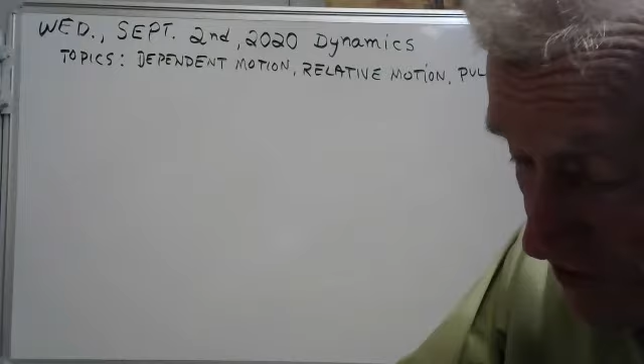This is today. It's about pulleys and how they work, and it also applies to gears and pulleys.

Well okay good, we still have 7 minutes before class, and you're my only student. This is a one-on-one right now. Do you have any questions on anything? Nothing comes to mind right away. Do you mind if I go grab my notes real quick? You take your time, do whatever you want, fix your coffee.

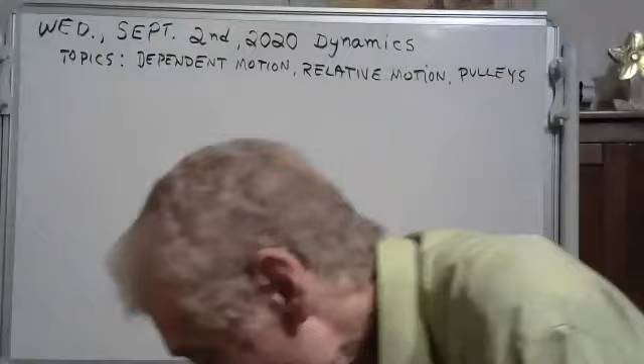Just took notes over 12.8 last night, and I don't really have too many questions over that right now. About where are we at with the lecture? What chapter, what part of the chapter? It's the tail end of chapter 12, I think, with the pulleys. Do you know what section we've got to learn? We've got to learn how to work these pulleys. Okay.

Have you tried watching the YouTube video? I haven't yet. I watched one last week. Nice to have it there in case you miss or in case you don't understand, you could watch it over. That might help. It does sometimes.

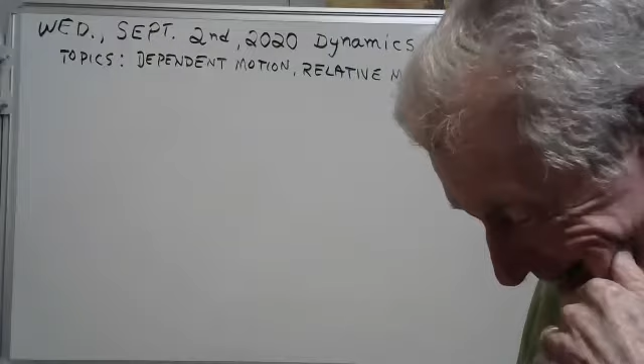Did you go to OSU Stillwater or OSU Tulsa? OSU Stillwater. Yeah, I was there last year actually, and I was bartending over at Murphy's down on the strip, but then COVID came along and closed everything down. So I decided to move back home and save some money while I'm finishing up. Good for you, Taylor. Thanks.

Well, I've never done any bartending. I'm a Southern Baptist, and we're not supposed to drink at all. Well, you're not missing out on much. Their drinks were pretty good.

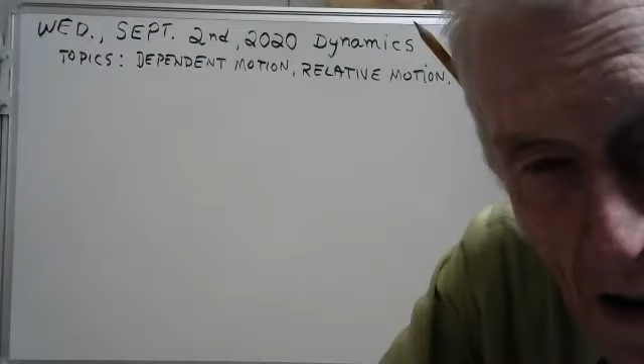The first topic is dependent motion. That's when two bodies' motion depends on one another, like for instance, a pulley. They have a lot of different kinds of pulley setups in this chapter. We'll just look at this one here. I happen to be on page 85, and they have a pulley set up like this.

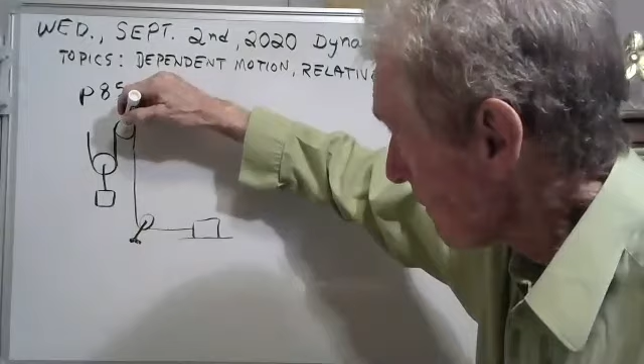You can tell if this is B and this is A: if pulley B goes down, A will go to the left. If this mass B goes up, A will go to the right.

My guess is B is going to go down, and A is going to go to the left. I don't think B is going to go up unless somebody pulled on A, and I don't see any forces there on A. So the interesting thing is they're dependent on one another.

You'll discover that A goes twice as fast as B. If B goes down maybe 2 inches, A will scoot over to the left 4 inches. It will go twice as far.

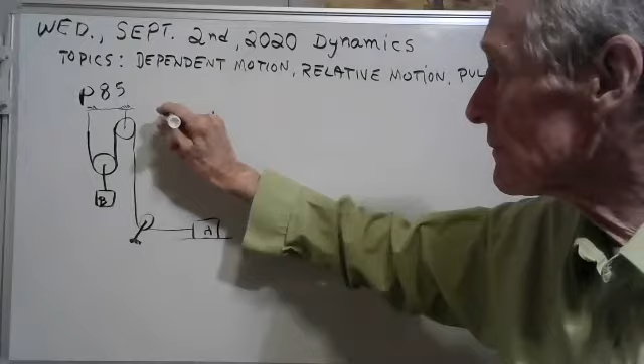The equation is called the dependent motion equation, and it would go like this. That's the dependent motion equation. It's the dependent motion equation.

You're looking at it. Now I need to explain to you guys how I got that and how you can get it. And then we'll talk about relative motion here in a little bit.

But for instance, if B has a velocity going down of, let's say, 2 meters a second, well, if you do the algebra, then you'll discover that the velocity of A would be -4 meters a second. The algebra says 2 times 2 plus a -4 equals 0.

Well, guess what? A goes to the left, and it goes to the left twice as fast. Twice as fast.

That's the dependent motion equation, and I need to show you how to get that. There's several ways.

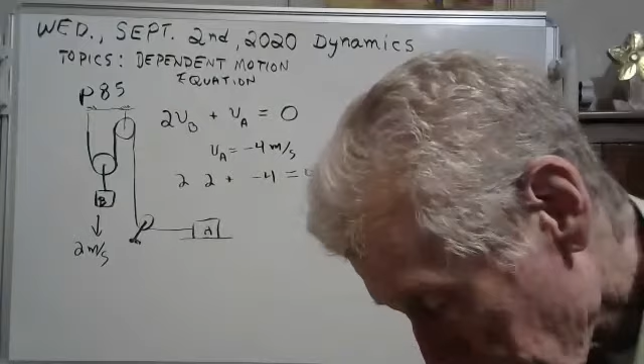Now, when they wrote this, they wrote it like this on page 86. They wrote the dependent motion equation like this. They put a minus here. No, I need glasses, my wife tells me. That's an equal sign. But that's the same thing that we did, pretty much.

Well, no, not exactly. Not exactly. Because, see, 2VB is not equal to VA. It's equal to a negative VA, right? So they're kind of confusing us.

What they did was they decided going to the left was positive for A. And so B going down is positive and A going to the left is positive. So it's a matter of how you define your positive and negative directions.

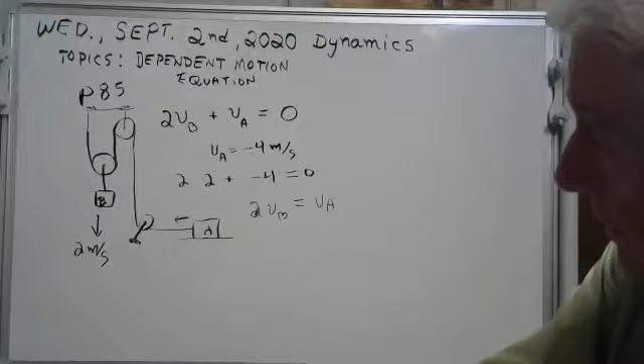Well, I don't know if that made any sense, but let's do some here. Let's do this one here maybe. That's too hard. Let's do an easier one. Why don't I do an easier one? They had to go and make things complicated there. Let's just put A right here.

And we need to write the dependent motion equation for that system. Now, the way the book says to do this is you make a... can't think of the word, but we're going to call this y of B, a variable. You're going to make a distance variable, and we're going to measure everything from up here where the pulleys are attached.

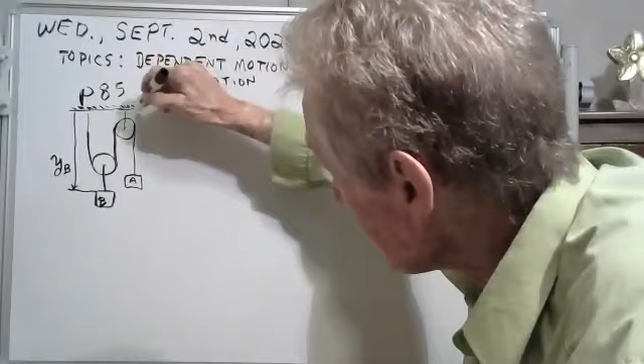And then we'll make this distance variable here for A, y of A. And here's the plan.

We're going to add up the lengths of this rope. See this rope here? It's the movable rope. See, this here isn't moving any. In fact, you don't even need a rope here. You could use a strip of metal. And same here, you could have a rope, or you could just have a strip of metal.

But the way the book says to get this dependent motion equation is you take this length of this rope here. Let me color it. I've got some red here. We're going to color this red piece of rope right here. Now that's equal to, that length is equal to y of B minus this length here. That's just a constant.

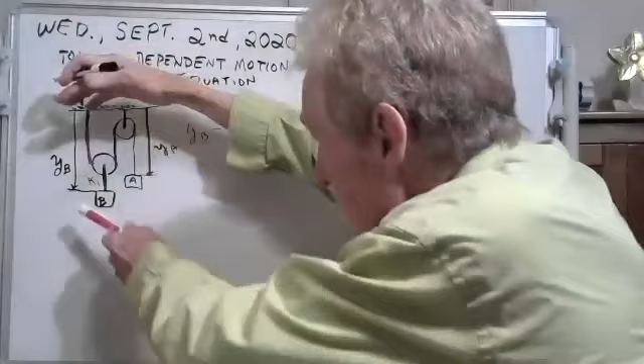Can we give it a name? How about K1. You understand, if you take y of B and you subtract this K1, you get the length of that red rope. And we're going to add up the whole rope.

Now we're going to go halfway around this pulley. Now, all the way around the circle is 2 pi r, so halfway around is just pi r, where r is the radius of your pulley.

We're adding up the lengths of the rope. Now we're going to add up this length right here. See this length of this rope right here? That length—does that come out in red? Kind of. Okay, now that length is y of B minus the K1 minus this length here. Why do we call this length here K2? It's just some constant. K2, there we go.

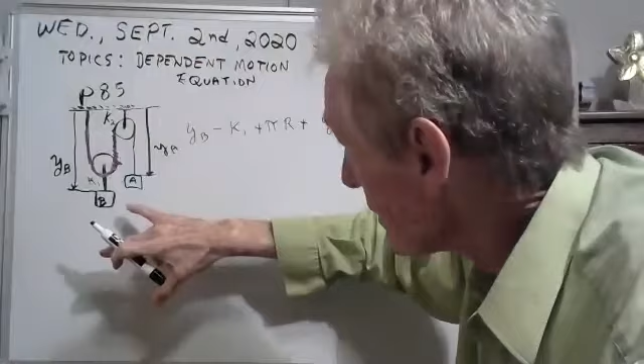So if you subtract K1 and K2 - here's K1, here's K2 - from y of b, you'll get this little piece of rope, won't you?

Yeah, I think you do. Okay, now let's add the half of the circumference of this pulley here. Now it's not 2 pi r, it's just pi r. So we'll add that, plus pi r.

And now we only have one little piece left. You see this piece of rope here, from here to here. And that will be y of a minus that K2.

Now, did all that show up? Yeah, that all showed up. I don't know if you can read my writing, but there you have it. Now, what is this all equal to? It's equal to the length of that rope. I don't know what to call it - how about L would be a good name? Just call it L.

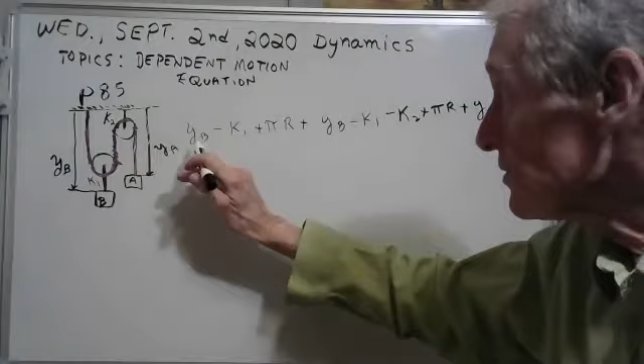We've added up all the lengths of that rope. Now, the length of that rope is a constant. We're going to take the derivative of all these. When you take the derivative of this, you'll get V sub B.

When you take the derivative of that constant - that K1 is this piece of metal or whatever, from here to here - that's just 0, just a constant. The derivative of pi r is a constant. The radius of that pulley doesn't change, pi doesn't change, so the derivative is 0. The derivative of yb is the velocity of b.

The derivative of that constant there is 0, minus another 0 for that constant, plus a 0 for the derivative of that pi r, plus the velocity of A, that's the derivative of YA, minus the derivative of a constant equals 0, because the derivative of the constant L, the length of the rope, doesn't change. And now let's finish writing this.

It looks to me like you got 2VB plus VA equals 0. We just figured out the dependent motion equation for that system. Do I need to go over that? Anybody need help with that, or are you okay?

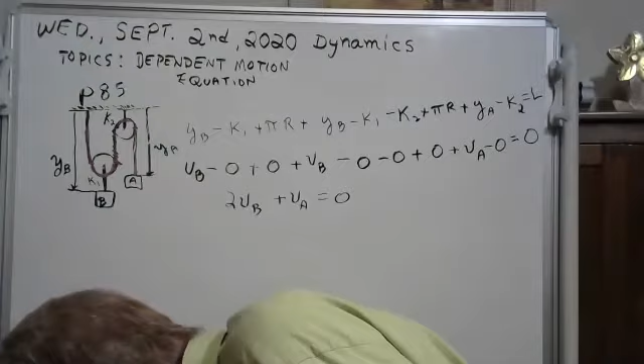Because if you're okay, we're going to do some more. Where did that second VB come from in the 2VB? Well, you got a VB here and you got a VB there. That makes 2 VBs. Gotcha. Okay, thank you for asking.

Okay, we're going to do some more now. Go to...

Well, before we do a different one, let me show you a much easier way to do this. There's a much easier way to do these. And the book doesn't tell you this - this is just between you and me, top secret, okay?

Pick out the body that just has one rope on it, and it's got this rope here, and there's tension in that rope. Let's call it T, okay? Now these are what they call massless, frictionless pulleys. And when you wrap a rope around a massless...

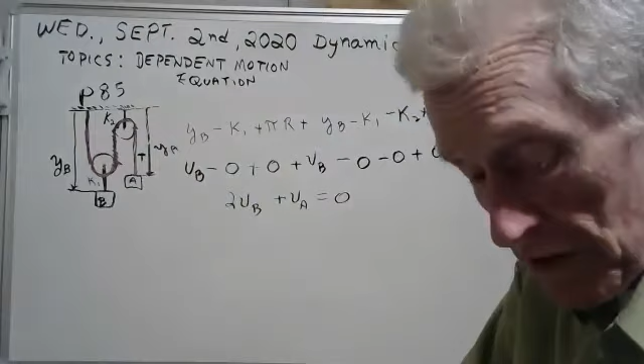What they mean by massless is that maybe that pulley weighs about 10 grams, but these bodies here could be 1 or 2 kilograms. So essentially they don't affect the motion at all because they're so lightweight.

But what I'm trying to tell you is you have the same tension in this rope, even though it goes around the pulley. And this goes around this pulley, and you have the same tension in this rope. And then what you do is you just count the tensions. Notice B has 2 tensions on it, so you write 2 VB. And A only has 1 tension on it, so you write 1 VA equals 0. Hey, that was a lot quicker and easier, wasn't it?

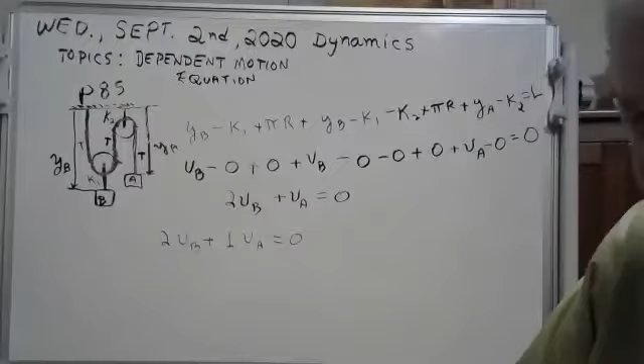That was a whole lot easier and quicker than going through all that mess about adding up the lengths of the ropes. Let's do another one so that you can feel secure about this. Any comments or questions before we do a different one? Nope. Okay, we'll say goodbye to that one there.

How about this one? This is fundamental 1239. And it looks like we have a...

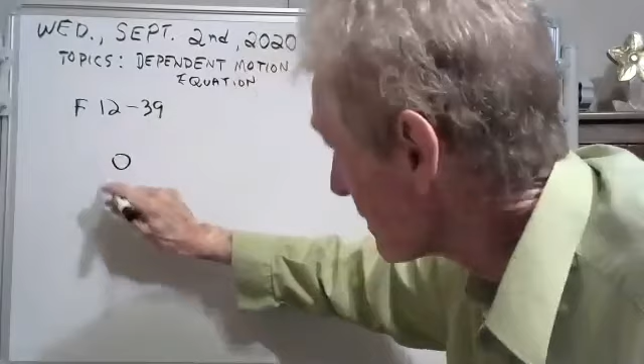Now, they don't have a mass here, but we could put a mass there. I'm just going to go ahead and put a mass there so we don't get too confused. Here's - they decided to call this D for some reason.

This comes up here to another pulley. Now there's just one rope here. See this rope? It comes up here, it goes around here, goes around here, goes around there. There you go. There's just one rope.

And you can use the same method that the book teaches. Let's do that.

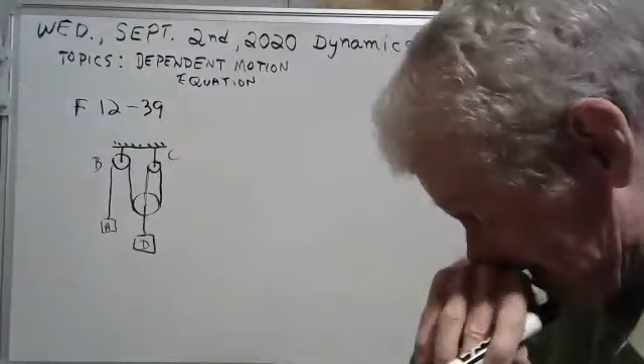Now they said that A is going down 3 meters a second. We'll get to that in a minute. Now you can tell by looking at it that D is going to go up. If A goes down, D goes up. So their motions are dependent.

But here's where you need these reference distances. Call this y of A.

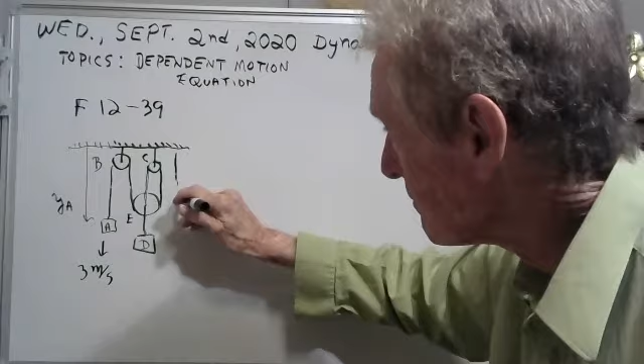We'll call that y of A. And we'll call this, they never gave a name for this. We got A, B, C, D. Why don't we call this pulley E? That'd be a good name for it. I'm going to call this little guy here C. I'm going to call this distance here y of E.

Now there's going to be some constants in here. I don't know, you could call that K1 maybe. And see this distance here, you could call that K2. And see this distance here, you could call that K3. They don't get longer or shorter, they're just fixed. Can you read all my writing? Maybe, probably need to write bigger. This is K1.

Okay, now using the method that the book teaches, we're just going to add up the length of this rope. See, this rope comes up here, goes around, comes up, goes around. We're going to add up the lengths of the rope. All right, well this first length, let me color that. We're going to add up this piece of the rope right here. There you go, see it? You know what that is?

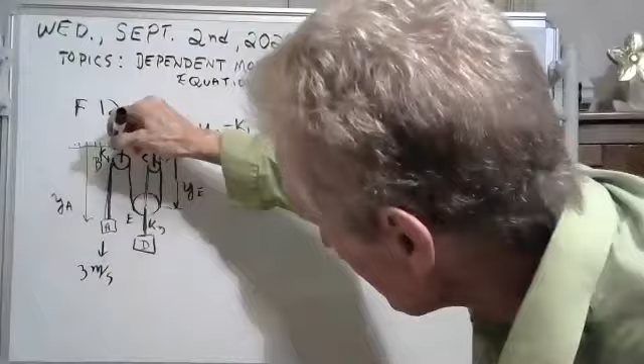That's y of A minus K1. And then you got to go, the rope has to go around that pulley. So that would be halfway around. Instead of 2 pi r, that'd just be pi r. Now these pulleys have different radii, but we don't care. It's going to drop out anyway when we take derivatives.

And then we need this length here of the rope from here to here. We're going to measure that. That's going to be y of E minus K1. And then we have to go around this pulley here, halfway around this pulley here. And that'll be, it's not 2 pi r, it's just pi r. It's a different r, but I don't know, if you want to call it R1 and R, we'll call it pi r prime or something. Those are going to drop out when we take derivatives.

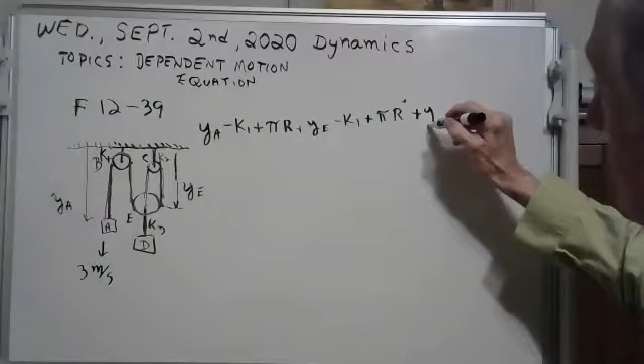Hey, we got this little piece here now. We've got to go from here up to here. And that is y of E minus K2. Yeah, okay. Then we have to go around this little pulley here. I know the radius might be smaller, but we don't care. I'm running out of room here, I'll go down a second row here.

I've got plus pi r, never mind, put a 3 on there if that makes you happy. And then finally, we got this piece of rope that goes from here to here. And that'll be y of e minus k2, right? Yeah, I think so. Plus y of e minus k2 equals the length of that red rope. Call it L maybe. And then you take derivatives with respect to time, and you'll get the velocity of A.

That'll be a 0 when you take the derivative. It's a constant, that's a constant. Pi doesn't change, and the radius of the pulley doesn't change. But this gives you VE. And then that's a constant, the derivative is 0, constant derivative is 0. Plus VE. And you take the derivative of y minus a constant, the derivative will give you 0 plus 0 plus VE minus 0 equals 0. The derivative of the length of the rope, which is a constant, is 0.

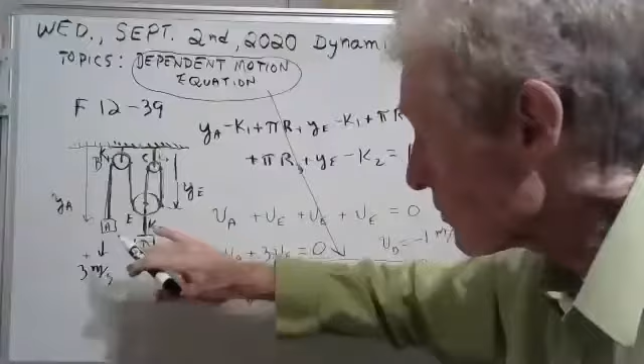And if you want to look at the answers in the back for F1239, let's see if we got that right. F1239 says here, it says here that the velocity of D is negative 1 meter per second, or you could just say it's 1 meter per second going up.

So that's how the book teaches you to do it. Now let me show you my secret way of doing it.

See this body here that's got one rope on it? We're going to put a tension on that rope. Going around this pulley, you've got the same tension here. Going around this pulley, same tension here. Going around this pulley here, same tension here.

Now we're going to look at this body D here. It's got 3 tensions pulling up on it, so the equation is going to have 3 times the velocity of D. A only has 1, so you're going to have the velocity of A plus 3 times the velocity of D equals 0.

Now, what was easier? What I just showed you guys there, which is the same equation, or doing it the way the book does it? What do you guys think? The second way. Yeah.

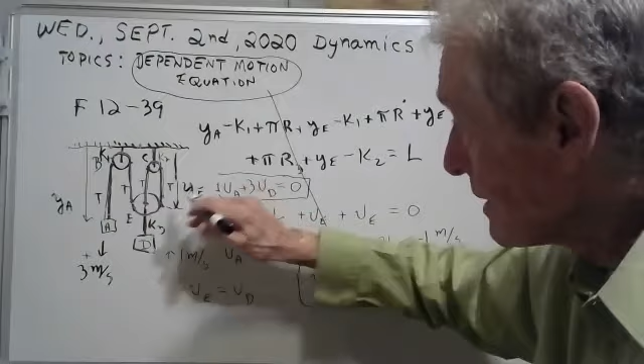In the third way, all you do is count the ropes. There's one rope acting on A, so you put a 1 right there in front of A. But there's 3 ropes pulling up on, movable ropes that is, pulling up on D. This doesn't even have to be a rope, it could be a piece of metal. There's 3 ropes pulling up on D, so you put a 3 there. That's another way of doing it, but that method only works if you have only one movable rope.

Now let's do one with 2 ropes, a little more complicated. Well, we're going to do a different one here. Okay, here we go. I'm gonna kiss all this goodbye, and we'll do a different one now.

Why don't I tell you about relative motion while we got this? There's also something called relative motion. You're familiar with this.

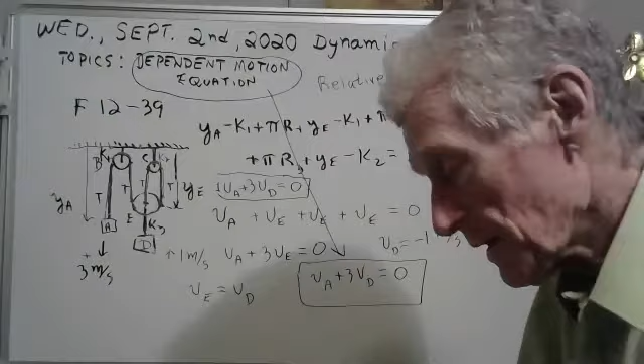For instance, if you're in an airplane and another airplane is coming at you head on, let's suppose—here, I need a little room to demonstrate this. Suppose you're in an airplane, and here's your airplane, and you're going 150 miles per hour. There you go. And suppose another airplane is coming straight at you, going 200 miles an hour.

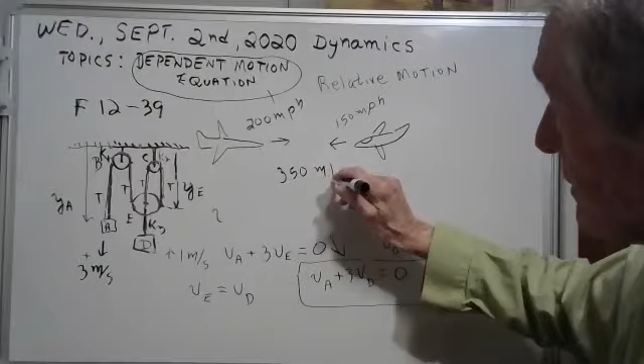Well, you're looking out of the cockpit, and you see this other airplane, and when you first see it, it's just a speck. But that speck is starting to get bigger and bigger and bigger. It's time to turn, maybe dive, make a turn, get the heck out of the way, wouldn't you say? Because if he's going 200 straight at you and you're going 150 straight at him, you know what that makes? That makes 350. The relative motion is 350.

They call that relative motion. You understand that, don't you? It's a relative motion. The equation for it—let's say this is A and this is B. The relative motion equation goes like this.

Now these really are vectors. And the way you read this is the velocity of A relative to B. Some people say with respect to B. What that means is the observer is at B.

We're going to put the observer at B. Here's B, here you are. I'll draw a little picture. There's the pilot right there. You're in B. Relative motion is relative to the observer.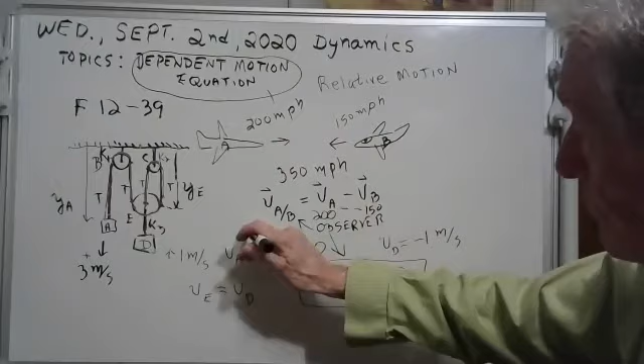And the velocity of A is 200 miles per hour, and the velocity of B is negative 150, because he's going to the left. That's a negative. Now, if you do the math, you'll get 350, the velocity of A relative to B, going to the right, because it's plus. This is the relative motion equation.

Now, on that problem we just did with the pulleys, if you wanted to do the relative motion equation, let's do that. Never mind the airplanes for a minute. We're going to find the velocity of A with respect to D, or relative to D. That's what that symbol means right there.

That's the velocity of A. It's really a vector—it's the velocity of A relative to D. What that means is the observer is at D. Here, we'll draw a little person here.

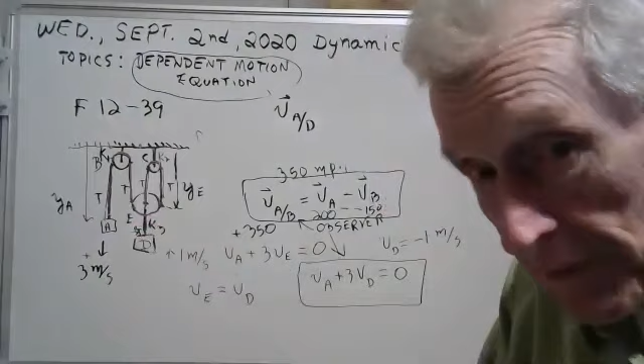There, can you see? That's too small. Let's make him a little bigger than that. We're going to draw a little person here.

And he lives on D, that's his home there, and he's looking at A. Now he's going up and A is going down. But the velocity of A relative to him is 4 going down. A is really only going down 3, but because he's going up, A appears to be going down 4. I don't know if that made sense, but here's the equation.

This is the relative motion equation. Now the velocity of A is 3. Now they decided that going down is plus. You could have a plus going up, but it'd be all right, but they wanted it to go down. And now D is going up, so there's a minus sign here in the equation, but see it's going up -1, remember? And so what you get when you do the math, you get 4. So the velocity of A relative to this observer is 4 going down.

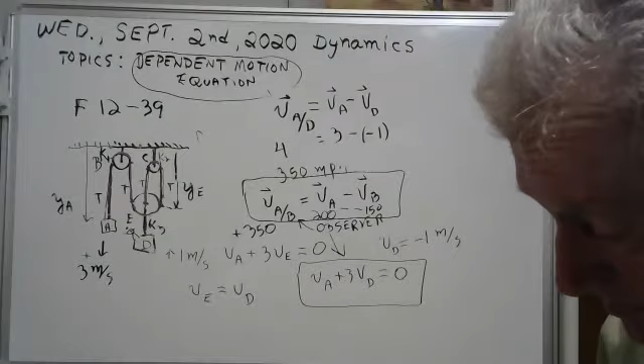All right, well, let's do one that's a little more complicated now, if that made sense. Any comments or questions? All right, well, let's do this one then. Here goes. I'll erase all this.

If you just tuned in, the topic for today is we're dealing with pulleys, actually, and dependent motion. We're learning how to write the dependent motion equation. I showed you how the book does it. Let's try this one. This is F1244. Okay, we're going to do F1244. Yeah. Okay. Well, let me draw it.

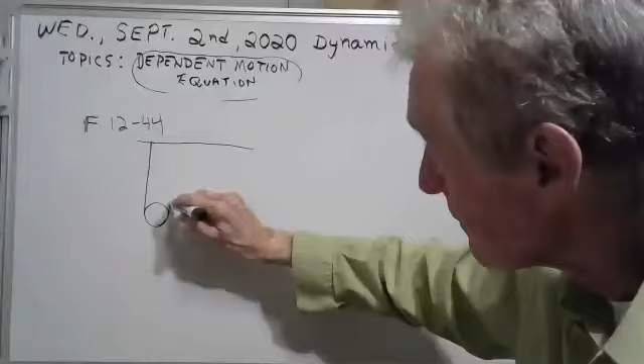I think I need more room. Let me give a little bit more room here. It's hard for me to do this, but I'm trying.

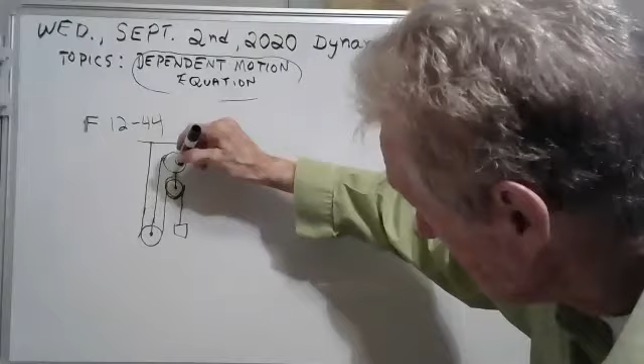Yeah. Okay, but now we got something going on here. He comes up here. Maybe that needs to be bigger, I don't know. Yeah. Then what? I'm having all kinds of trouble here. Coming down here, and then we go over this one, yeah. Okay, now that part I did all right. This comes up here, but where does this one go?

Guys, let me start all over again. I'm having a heck of a time here. We'll get it. Just be patient. Be patient.

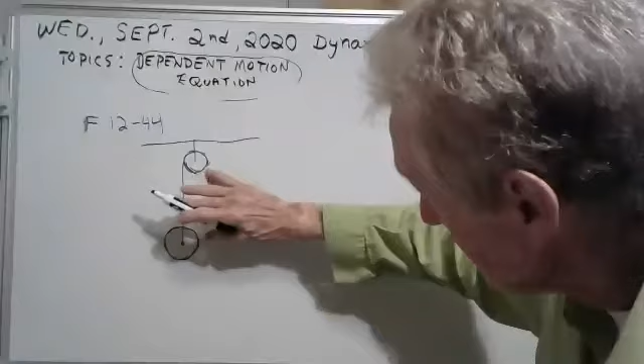Okay, I'm going to draw that one. And then this one comes down. And then it comes down here. Yeah, there we go. And this one, maybe make that a little smaller, not much. Make it a little smaller. Yeah. Yeah, that's better. Yeah.

That's not right either. Guys, I'm sorry. I'm having a heck of a bad time here. We're going to get this though. Yeah, here we go. Now it's cooking. Okay. I think I finally got it.

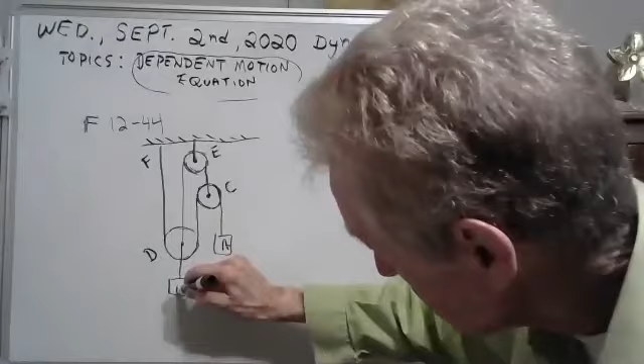Now they label this F and D. All right, that's fine. F and D. And they label that E and C. Okay. It's pretty good. And they label this A and B. Okay.

Well, let's do it the hard way the book says to do it. We did get it right, right? Yeah, finally. Okay, we're going to do it the way the book says to do it.

And what you need here is you need this distance here. We'll call it y of, how about y of d? That'd be good since that's d. Yeah. That's y of d.

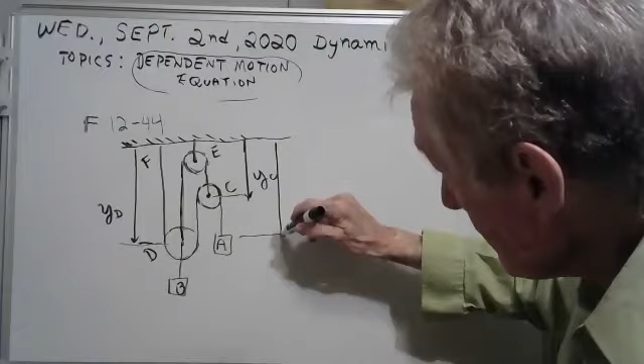And how about this? We could call this y of c. All right, that's y of c. And this here is y of a. Let's do that too. Y of a would be here. All right.

Well, I think we're ready to go then. Now we're just going to add up these ropes. Now there's two different ropes. That won't stop us. We're going to take and add up this rope here. See it? And that's going to be, well, that's just y of d, isn't it? Y of d. And then we're going to go around this rope or this pulley here. That's going to be plus pi r.

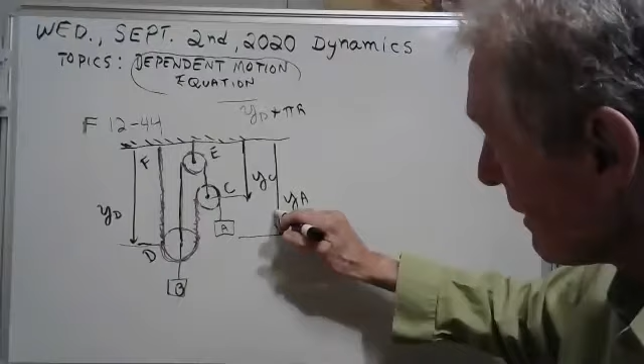And then we're going to go this rope here. That's going to be, now let me think about this. I probably shouldn't have A at the same place there. Let me scoot A up just a little bit so I don't confuse myself. We'll have A go to right here. That's better. What I need, I'm trying to add this piece here. You know what that is? That's y of c. No. It's y of d minus y of c, I believe. Y of d minus y of c. You think? Yeah.

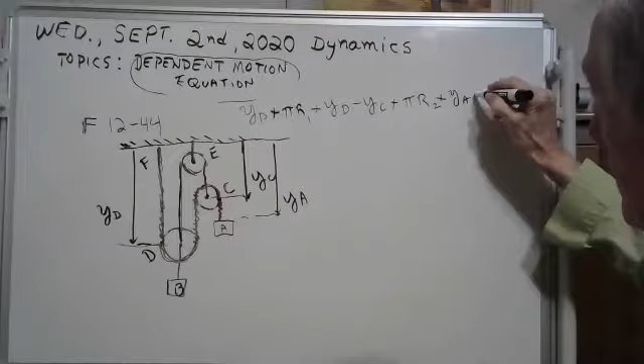Then we're going to go around this pulley here. That's just pi r plus pi r. The r might be different. You can have it R1, R2 if that makes you happy. And then finally, we're going to go this length of rope from here to here. You know what that is? That's y of a minus y of c, isn't it? Yeah. Y of a minus y of c equals, call it L1, the length of the red rope. All right.

Now we're going to do the other rope. There's two ropes, let's color it blue. See, there's a red rope, but there's also this blue rope. So let's color it, here we go. We're going to go from here to here now.

It's blue, does that show up blue on your thing? Not really. I can't help it, that's what I'm trying to do. I'm trying to add up that rope there.

Okay, now that's going to be y of d minus some constant, call it k1 maybe. So you have y of d minus k1, plus you're going to go around this pulley here. That's going to be a pi r, plus pi r. Is that the same r as we had before? No, that's a different R. I don't know, call it R3 or something. We don't care. And then finally you have this little piece here from here to here, that's y of c minus that k1.

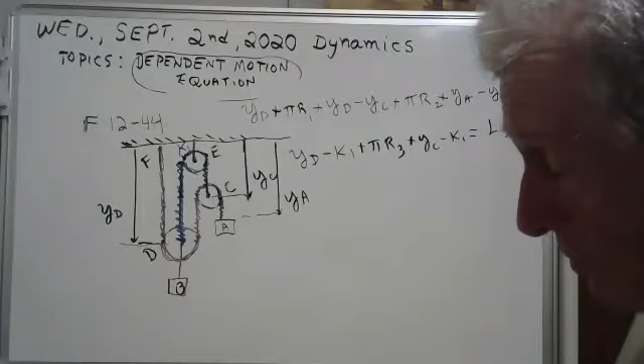Equal, call it L2, the length of the blue rope. I don't think blue really showed up very good on that.

Now, if I made a mistake, somebody tell me. Did I do okay so far? Is anybody awake out there? Looks good. Oh gee, let's see who this is. I can't talk right now.

Okay, well let's take the derivative of these. Now when you take the derivative of that, you'll get, let me do it down here someplace. You get the velocity of d. That'll give you 0 when you take the derivative of a constant, plus the velocity of d minus the velocity of c, plus 0 when you take the derivative, plus the velocity of a minus the velocity of c equals 0.

Okay, you could clean that up a little bit. It looks like we have two velocities of d minus a velocity of c. No, there's two of them, minus two velocities of c plus the velocity of a equals 0. Okay, now that's a keeper. Let me box that up because I'm going to use that here in a minute.

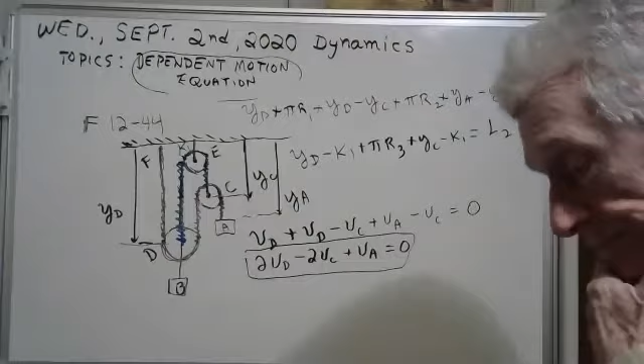But now we're going to look at the second equation. Now when you take the derivative of this one, you get the velocity of d, that's the derivative of the distance to d. Derivative of distance is velocity, minus 0, plus 0 when you take the derivative, plus the velocity of c minus 0 equals 0. So that one says velocity of d plus the velocity of c equals 0.

Ta-da, there's that one. Now what we're interested in is a and b, we don't care about c. These are the ones that we want to know. So what we're going to do is, for one thing, the velocity of b is equal to the velocity of d. And so we could replace this with a 2 times the velocity of b. And you see the velocity of c is negative the velocity of d.

Here, I don't know, this is getting too weird. The velocity of C is a negative velocity of D, so let me do it that way. We got two velocities of D minus 2 times the negative velocity of D, that makes plus the velocity, 2 times the velocity of D, plus the velocity of A equals 0. Now, since the velocity of B and D are the same, you could just add these and you could get 4 velocity of B plus the velocity of A is 0.

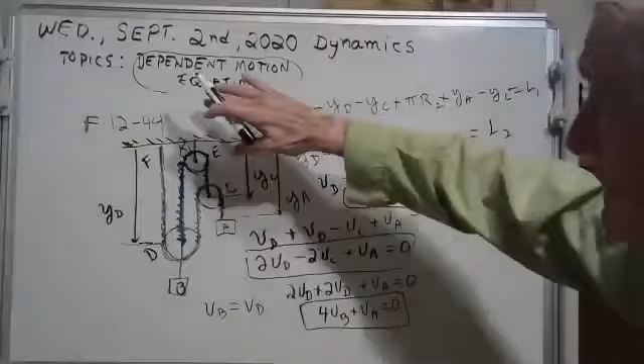And we're done, ta-da, we have just done the, they have a name for that. It's called the dependent motion equation. We just did it. This is problem 1244.

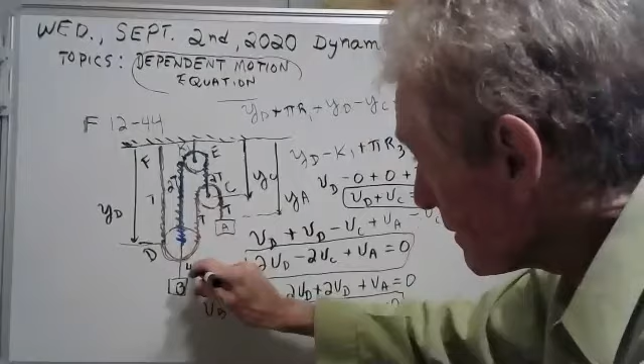But now we could do the same thing with the method I showed you, and it's a lot easier. Put a tension right here for this tension connected to A. You have the same tension around that pulley here, and you have the same tension here. Now, you see these two tensions pulling down on this pulley? That makes this cable or rope or cord 2 tensions. So coming around this side, you have 2 tensions, 2T. Now I want you to look at what you got here. You got a T, a 2T, and a T. That makes 4 tensions.

So this strap or pulley or cord connected to B has 4 tensions. You got 4 tensions connected to B, 1 connected to A, and so you can write it like this: 4VB plus VA equals 0. Wasn't that easier?

And now we'll solve the problem. They said here, A goes down 4 feet per second. If A is going down 4 feet per second, put a 4 right there and solve for B. What you'll get is B is going to go up 1 feet per second.

If A is going down 4 feet per second, B will go up 1 feet per second. Now look at the answer, F1244. Let's see if we got that right. Go to the back and look up F1244. They said the velocity of B is negative 1 feet per second, which means 1 feet per second going up.

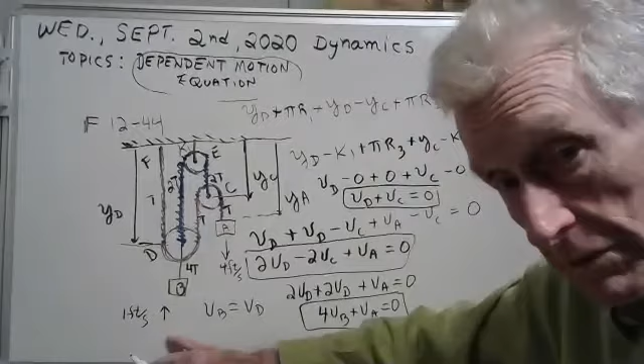There you have it. Okay, great. Do you have any comments or questions on that? Well, if not, we'll just work some more.

But I'm tired of doing it this hard way, aren't you? Let's see if we can do it the easy way from now on. I mean, why go through all that agony? Look at all that mess we had to do there. It's a lot easier just to do it that way.

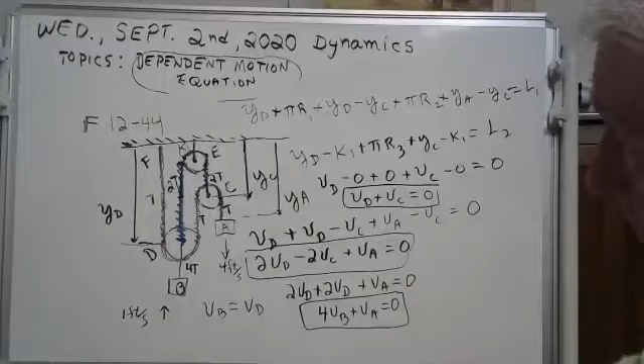Okay, well, let's try some more here. Any comments or questions so far? Well, you're awfully quiet. That's all right. Okay, well, here we go. We're gonna try another one now. I'm gonna erase all this if you're happy. All right.

Okay, it's Wednesday, September 2nd. We're studying pulleys and how they work. Let's do 12,205. Let's see if I can draw this one without goofing up.

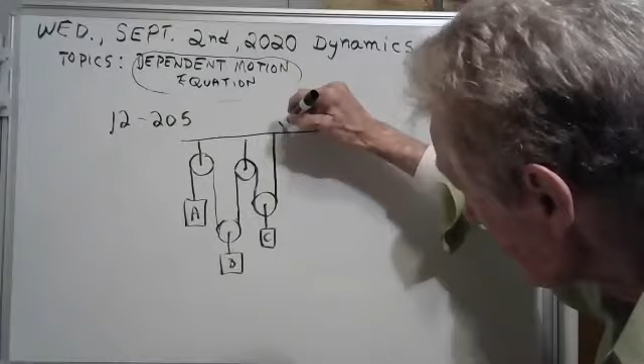Now, did I get this thing drawn? Did I get it drawn right? I think so. Okay. Now let's write the dependent motion equation.

Let me be quiet for a minute, and let's let you have a try at it. You write the dependent motion equation, and I'll be quiet, and then we'll see what we think. Go ahead.

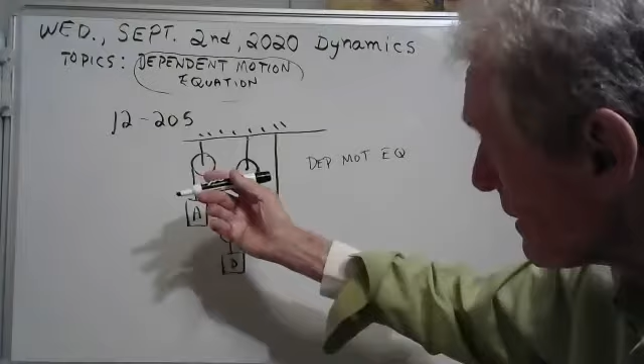Okay, time's up. Let's see how we did. Now, we could go back and do it the way the book says, but who wants to? Just put a T right here. Come around here, put a T right there. Come around here, put a T right there. Put a T right there. And a T right there.

Now we're going to write our equation. Notice there's one tension on A, so you go 1 VA. Look, there's two tensions on B, so you go 2 VB. Look, there's two tensions pulling up on C, so there's 2 VC equals 0. We have just written that. Is that what you got? I'm hoping. Yes, it is.

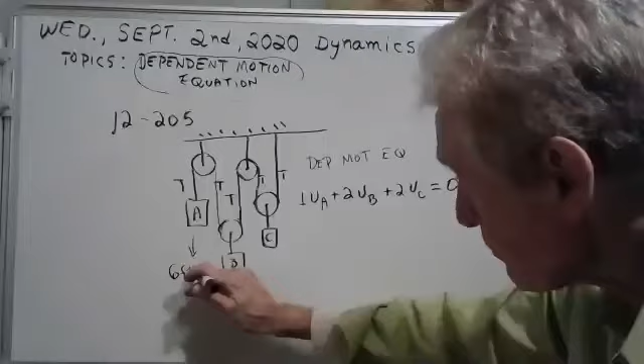Yay. Now let's solve the problem. Good. They said A is going down 6 feet per second. All right, let me write that. 6 feet per second. So they decided to call down plus, so that will go with what they said. So you have 1 times 6.

And then they say C is moving down at 18. All right. C is moving down at 18. So I can do that. I got 12. Wait a minute. I think it's minus 12.

Did I do that right, algebra students, or math? It's really not algebra. It's just addition and multiplication, isn't it? 2 times 18 is 36. It's wrong. 36 and 6 is 42, right? Well, I don't know. Would it be 21?

Let me do it on my calculator here. Yeah, I got 21. Yeah, well, we should be able to do that. 36 and 6 is 42. And then you divide by 2, you get, yeah, 21. What does that mean? Well, in minus, if going down is plus, minus is going up. So it means that B is going up 21 feet per second.

And C, they said, is going down 18 feet per second. Now let's read the problem: determine the relative velocity of block B with respect to C. Oh, well, we haven't answered their question yet. See, what they want is the relative velocity of B with respect to C.

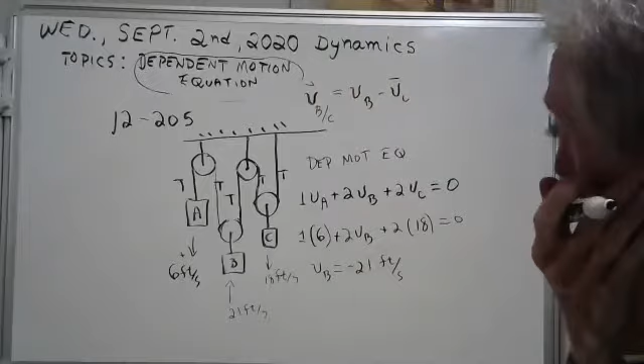Now, here's how the equation goes. That's how you do the equation. Now, what is the velocity of B? Well, it's minus 21, right? And there's a minus sign in the equation. What's the velocity of C? It's a plus 18, isn't it? They said going down is plus.

So I'm getting 39, right? Yeah. I'm getting this here is minus 39. What does that mean?

Well, that means if you live on C, here, let's put our little observer right here. Here's our little observer. See, I drew a little man right there, a little woman there, whatever. The person is riding along there, and they're going down, and they're looking at B. Well, B is going up, and they're going down. To them, B seems to be going up 39. They think B is going up 39 feet per second.

Now let's look at the answer. 12,205, go to the back, and we'll see how we did. They said 39 feet per second going up. The answer is 39 feet per second going up. So we did great.

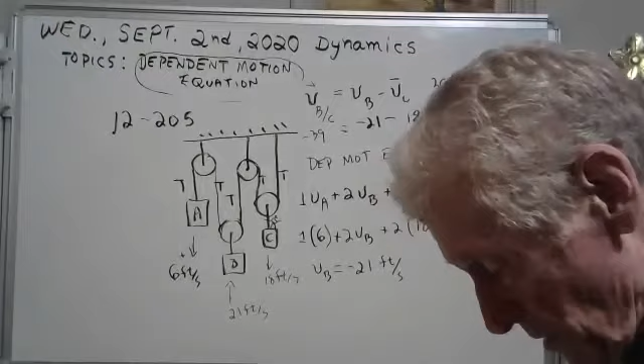We did that. Okay, let's do some more. Let's do this one. Any questions on that, though? All right. Well, let's do another one if you're happy. I'm going to erase this. There's your chance to ask a question. Okay.

Now this one is 12,199.

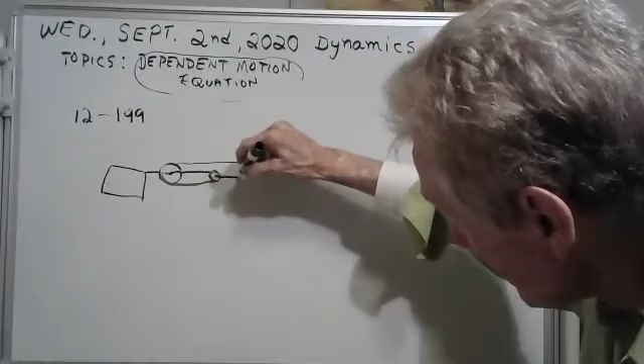They've got a, it looks like a log there maybe. Yeah, they've got some kind of log here, and they put a pulley on there. And they've attached this pulley. Well, it's actually attached to a tree, but we'll just draw something solid there that it's attached to. They're going to call this C here and call this B. And this log is on the ground, and they got this connected to a pickup truck, looks like. And the truck's going to pull that.

First, we're going to get the dependent motion equation, and then we're going to write their equation. Then we're going to answer their question.

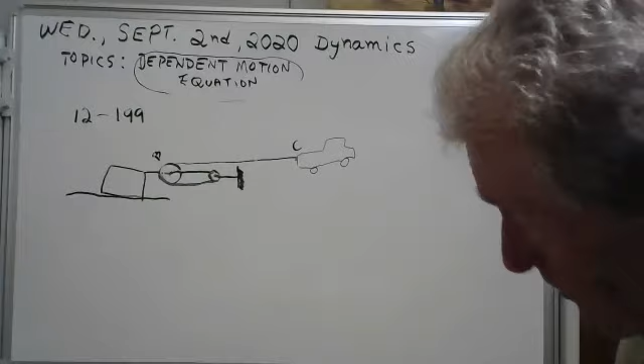Okay, now this is a pickup truck here, actually. There you go. What we need is the, I think we're going to call this log B. What we're going to do is we're going to find the dependent motion equation.

And I'm going to be quiet. And what I need is I need you to relate the velocity of the pickup truck, which is C, to the log, which is B. Okay, I'm going to be quiet for 1 minute, and I want to see if you can write the dependent motion equation. Go for it.

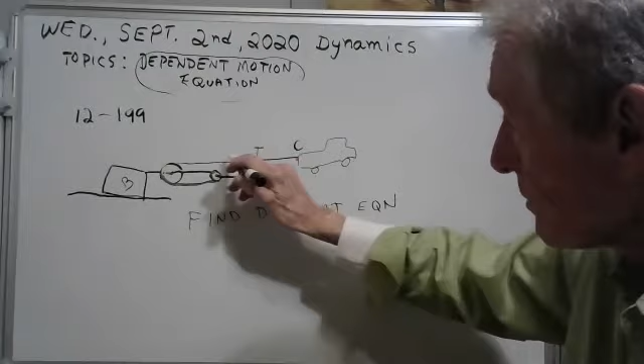Okay, your minute is up. If you put a tension here on this cable, you'd have a tension on that cable and a tension on this cable. And if you look at this body B, it's got 3 tensions on it. And so you would have 3 velocity of B, and...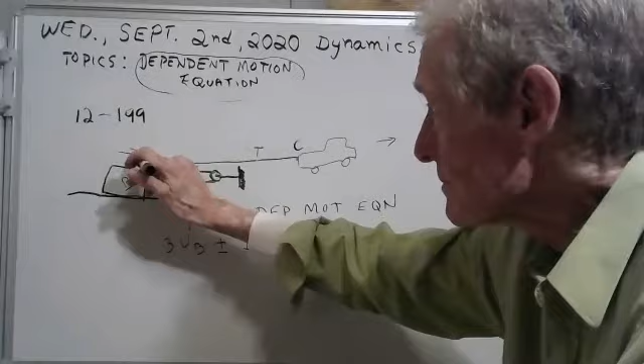Here's where we're going to run into a problem. You have to decide, see, I think this is going to have to be a minus. I know it's going to be 1 velocity of C. It's going to look like this, but is it plus or minus? Well, the thing is, we know B is going to, they're both going this way, right? Obviously, they're both going that way. We're going to define this as the positive direction. And so you've got to have a minus here.

You understand about the 3 and the 1 business, because that's got 3 tensions pulling on it, and there's only 1 tension on the pickup truck. But why the minus? Well, because if this is positive, that can't be positive. You can't add a positive and get 0.

Now I'm not doing a very good job of this, I know. We know that I think the equation's got to be like that. There's 3 there and 1 there. But why does it have to be minus? Well, because if this motion is positive, and if this motion is positive going this way, you have a positive minus a positive. You can get 0 with that, yeah.

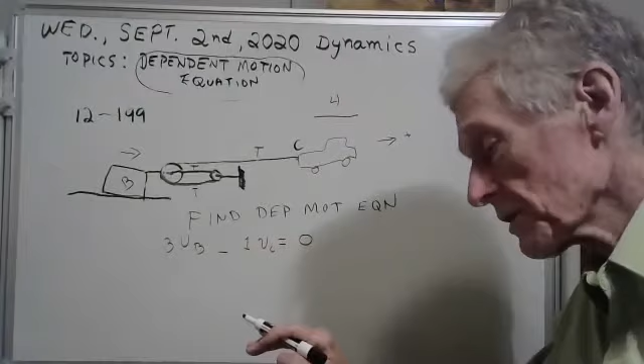To get distances, you would have to integrate. The way it works is the integral of v dt is equal to your distance. Here, let me refresh your memory. Velocity is equal to the derivative of distance with respect to time. See if you can get to here with me. I know you can go from there to there. And then when you integrate, this will give you your displacement or the change in your position. And so when you integrate this, you'll get this equation here.

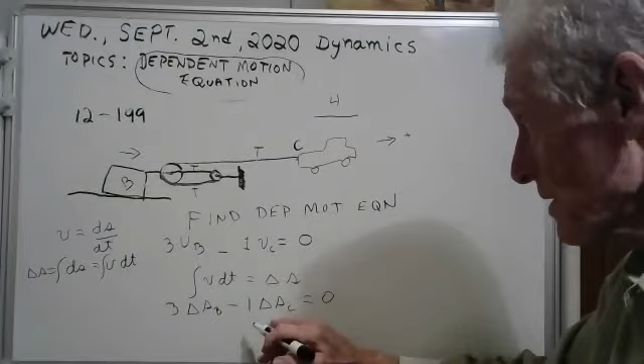Is there room to write this? Barely. You get 3 delta S of B minus 1 delta S of C equals 0. Now they said that C goes 4 feet. So you put a 4 there. Goes to the right. We just said that's positive. So you have 3 times something minus 1 times 4 is 0.

Well, that must mean that the distance that B goes, probably should have put an X there. You know what? Instead of S, we could have just put an X. That S is just a dummy variable. But the distance that B goes is 1.333 feet, because 3 times 1.333 will give you 4. Subtract 1 times 4 gives you 0. The tree goes 1.333 feet. The pickup truck goes 4 feet.

That goes 1.3, 1 1/3 foot. All right, great, look in the back, let's see how we did. 12,199. 12,199 says 1.33 feet to the right. We got that right. Yay, we did good.

Any questions so far?

Yeah, I had a question about the tension method. Could you start at the log at B and work the T's out going the other direction, or is it important that you started at point C and worked the T's out going that direction?

You could start at B. Now, who am I talking to? This is Taylor. Okay, Taylor, if you did it that way, here's what you'd have to do. You'd have to call this T right here, wouldn't you? And so this would be T over 3, and this would be T over 3, and this would be T over 3. And so this one here would be T over 3.

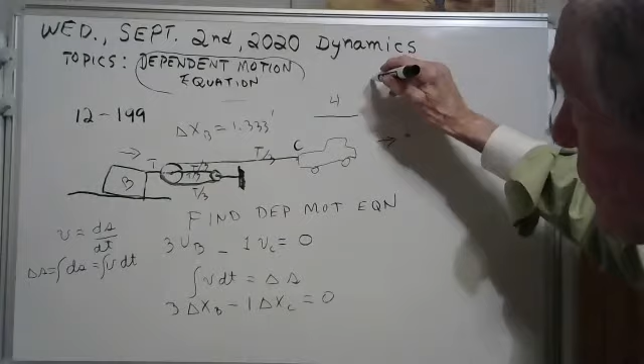And what you'd have is 1 velocity of B plus 1/3 the velocity of C equals 0. Now you can do some algebra, multiply by 3 everywhere, and you should get this, which is what we got. Yay, that's what we got. Did that make sense? Yes, it did. Thank you very much. Yeah, anytime. So it's easier to start with the thing that has just one rope connected to it and call it T.

That is easier, yeah, it's a little easier. Okay, now I mentioned you can get displacements from this. You can also get accelerations. Here's a little room right here, let me write that for you.

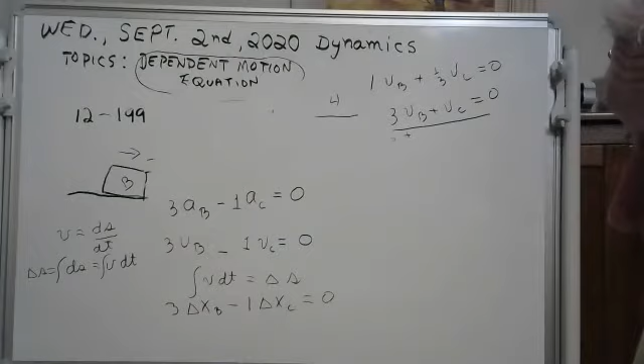If this is the equation for the velocities, this is the equation for the accelerations, because it's just the derivative. If you take the derivative of this, it's 3 times the acceleration, there's a minus sign. If you take the derivative of this, it's the acceleration. Of course, the derivative of that 0 is just 0. So you can get displacements and accelerations and velocities. These are all dependent motion equations.

Okay, well, we got 9 minutes. I wanted to show you one last thing, on the relative motion equation, this one here that we told you about, we've just been working in one dimension. Let's show you that if you deal with vectors in 2 or 3 dimensions, it's still good, that equation is still good. It's just that we're dealing in 2 dimensions now.

Now let's do one. Here's one that looks like fun. This is problem 12,218. Now I wonder if they have answers in the back, because I want to see if we can get it. 12,218, do they have answers in the back? Yes, they do. I'm not going to peek.

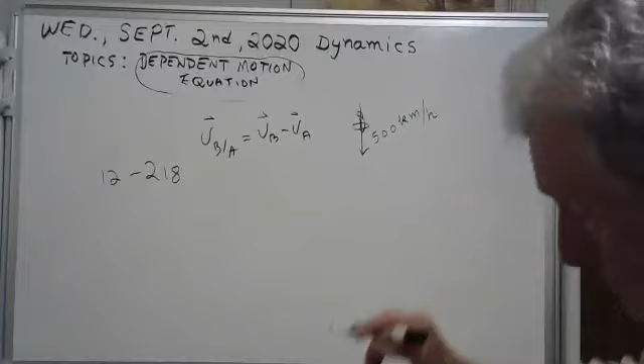Okay, now here's the deal. Here's this airplane here, going straight down. Not a very good picture, but we tried. There's this airplane, and it's going 500 kilometers per hour. Okay, straight down, that's the velocity of airplane A. Now here we've got the velocity of airplane B doing this. Velocity of airplane B, this is no longer just one-dimensional. It's 700 kilometers per hour.

And this angle here, there's an angle here. Boy, I didn't do that angle very good. It's supposed to be 60 degrees. Let me try doing it better. 60 degrees would be more like that. Here's your airplane here, and this is 60 degrees. And this one's 700 kilometers per hour, it's going this way. So there's your velocity of B. And the velocity of A is 500 kilometers per hour, it's going this way.

Okay, well, here's your equation. Now, what do they want to know on this? Let me read this. Determine the velocity of B with respect to A. Well, that's what this is, we're going to solve this equation, we're going to find the velocity of B with respect to A.

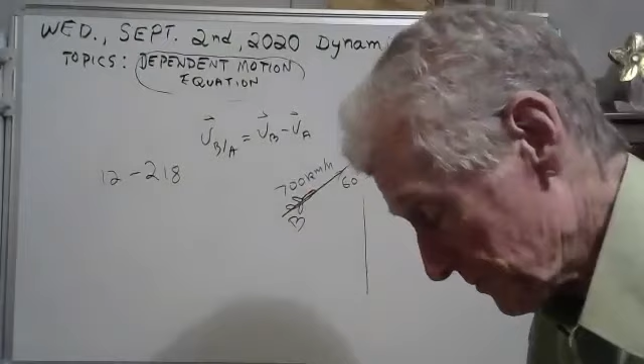Here, let's put, well, there's a little pilot. He's looking at this plane here, and we're going to write the relative motion of B relative to him. Now, how do you do that? Well, you have to subtract vectors. I don't know if you remember how to do that. The way they taught me in school to subtract vectors many years ago, you put their tails together. I wonder if they still teach that. So here, let me do that. You really need a protractor to do this right. So what I'm going to do is I'm going to make a 700 kilometers per hour vector.

Let me do the 500 first. Okay, here's the 500. I'm doing this to scale, actually. I did 5 inches there. There's your 500 kilometers per hour, and that's your vector. But now we're supposed to put the tails together.

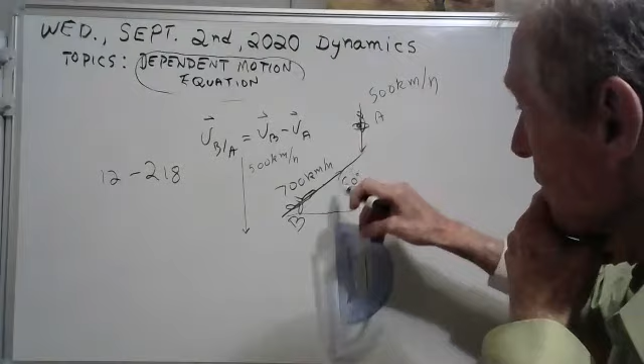Well, how do you put the tail on that? That's the tail. I need a 700, but I need it to go up from here. What angle will that be? If that's 60, that means that's 30, huh? I need a 30-degree angle. How do I do that? Or would it be a 60 from here? Let's see, I think it's 60 from there. Okay, now there's 60.

And I need 700. I need some room here. I'm not real sure I did that right, but we'll double check it.

This is how you subtract vectors. What I'm trying to do is subtract the velocity of A from the velocity of B. And the way they taught me in school, here's the velocity of A. It's 500, I measured it, 5 inches. Oh gee, I'm running out of time.

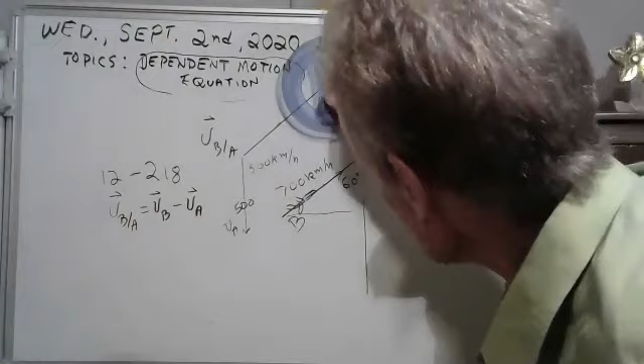And then this one here, I made this angle. Wait a minute, I think I did that wrong. I need a 60-degree angle up there. I don't think I have that. Oh gee. I need a 60-degree angle up there. Yeah, I do, there's 60. Yeah, I did pretty good. So that means this would be 30 down here. Yeah, it is, I did that right.

And so this one is 700 kilometers per hour. There we go. And where does the vector difference go? Well, it goes from A to B, all the way up to here like this. Did they teach you this in school? That's it. And I tell you what that is in inches, it's about 11.

So the velocity of B relative to A is around 1,100 kilometers per hour. But see, it's at an angle going up, and that angle going up is - I could get this exact with more time, but we'll look and see how we did. This turns out to be dang close to 60. It's more like about 50, 58 maybe.

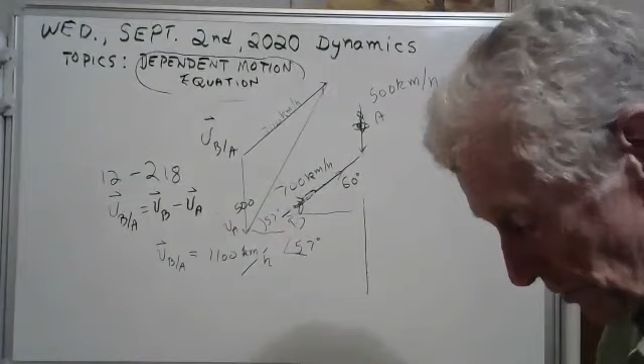It's hard for me, I need my glasses on I guess. It's around 57, 58. We're talking about this angle here. It's around 57 degrees. Now let's look at the answer because we're running out of time. It's sad, but look in the back at 12, 218, and let's see what they said the answer is. 12, 218.

There it is. Now they said it's, here's what they said the answer is: 1044 kilometers per hour at 54.5 degrees. Now we're off because of my graphical method. I said 57 degrees, they said 54.5, so I'm a little off. I said 1100 with my crude 11-inch ruler there, and they said 1044. To get it correct, oh, we're out of time.

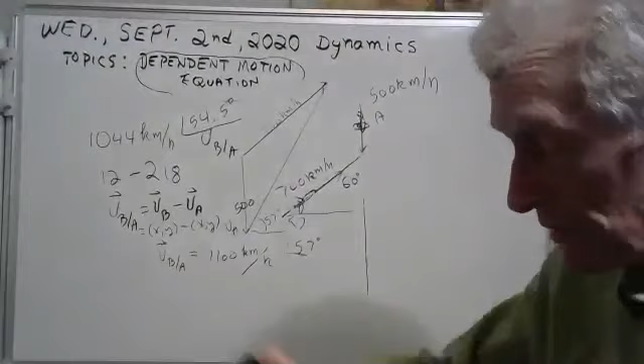To get it correct, you'll need to convert these into X and Y, and subtract them, and you can get the exact amounts, and you'll get the right answer. But this is what it looks like. If you live in this airplane here and you're flying along, this airplane appears to be coming kind of at you, but he's also kind of moving this way. He's coming at you, but he's moving from your right to your left.